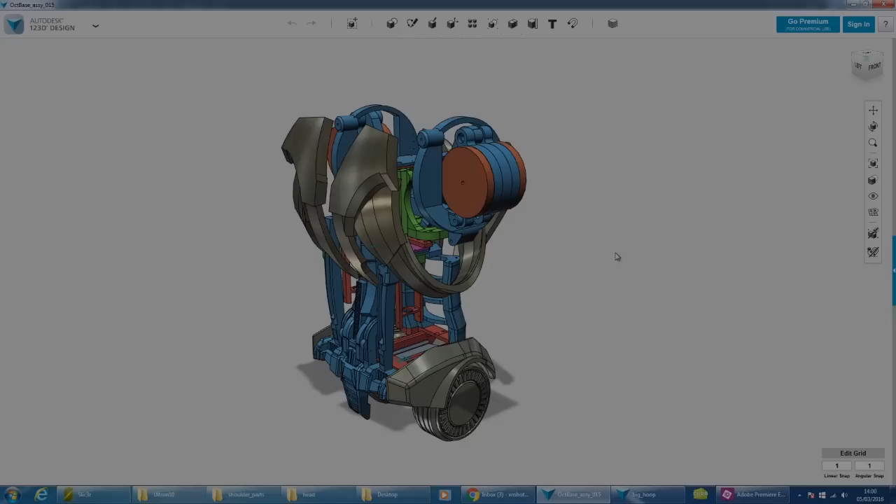The first thing I'm going to do is print some more of the shoulder pieces. I'm going to print these giant sections in here, which are basically most of the lever mechanism. These are going to need to be cut up to be printed. Obviously it's quite a complicated piece. I'm going to print that and this lever, and then after that we can work on the shoulder hubs.

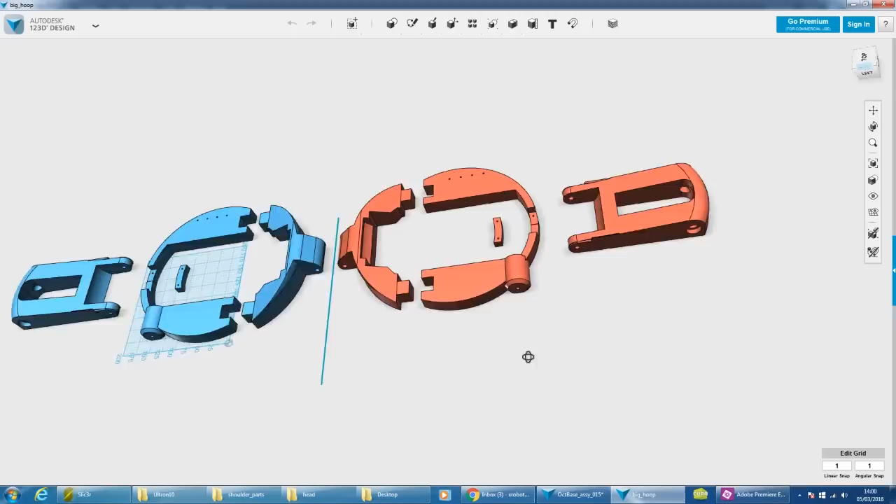So I've cut the parts up here so they fit on the print bed, and these can all be printed in individual pieces. They're all going to be printed in ABS so they can be solvent welded back together when I'm done. I've left these sort of keys so they plug in, and I've divided these into two with a little lump that will screw in there to try and fit that back together. So hopefully they'll all go back together and make one large piece, which is the main shoulder pivot hinge.

Right, here we are. So I've printed all the pieces. They've come out pretty well. They're all large ABS pieces. There's hardly any warping, so pretty happy with those. Tiny bit in that corner, but on the whole that's just a bit of the brim that needs trimming off. So yeah, on the whole, really good prints.

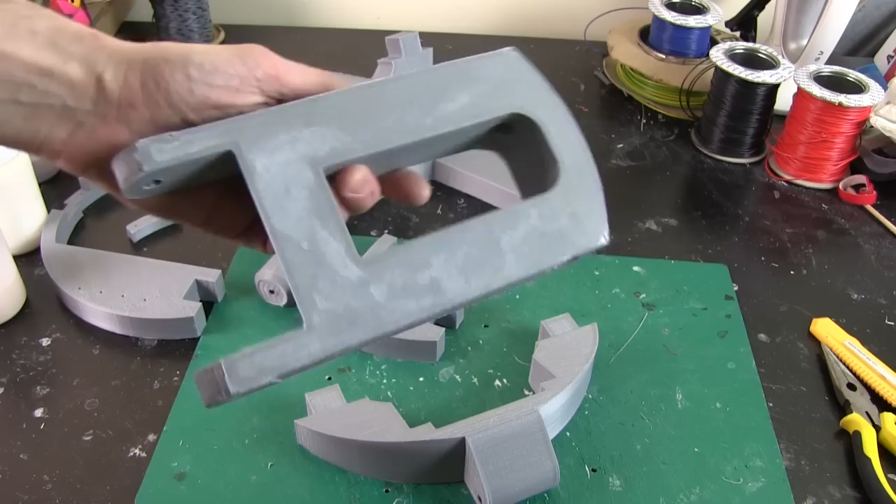Some of them were printed lower density. This piece, for instance, is much lighter and it's only 10% infill. You can see the top surface has suffered slightly there, and that's because there's hardly anything to print the top surface on. There's still 4 top layers, but it's got a bit churned up. But basically these should have some sort of pattern on, so I'll be printing a flatter plate with a veneer to stick on with some patterns on that cover that up, so I'm not too worried about that.

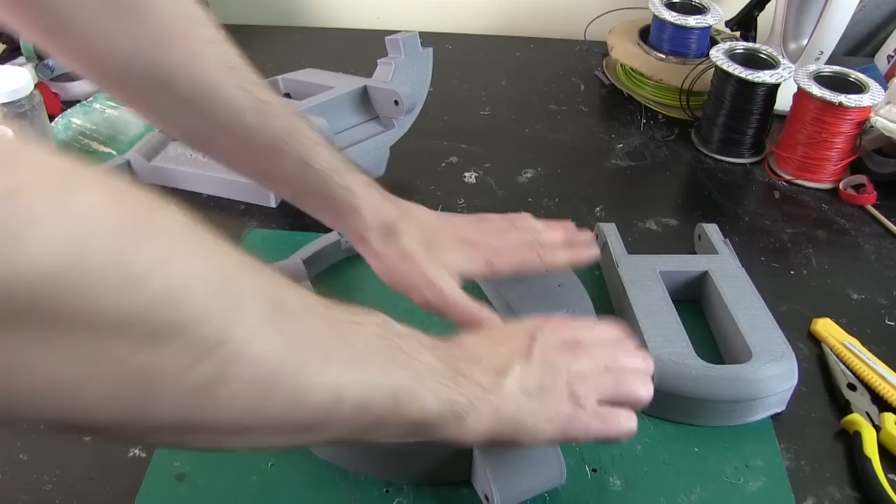But all these parts should lock together. So that goes on there, that goes on there. I've got this little bit, as I said, which goes across the top. So I need to just knock out the corners with a file there, but they should fit together pretty well and they can be solvent welded. And of course this piece is made of 2 bits, so that's the main pivot, and that's where the hub hinges, and that's where the whole thing gets pushed up.

So that is... I can even get it apart, a really tight fit. So again, I just need to attend to those edges with a file and they should fit together really well, and we'll make solvent welds and build these whole pieces up.

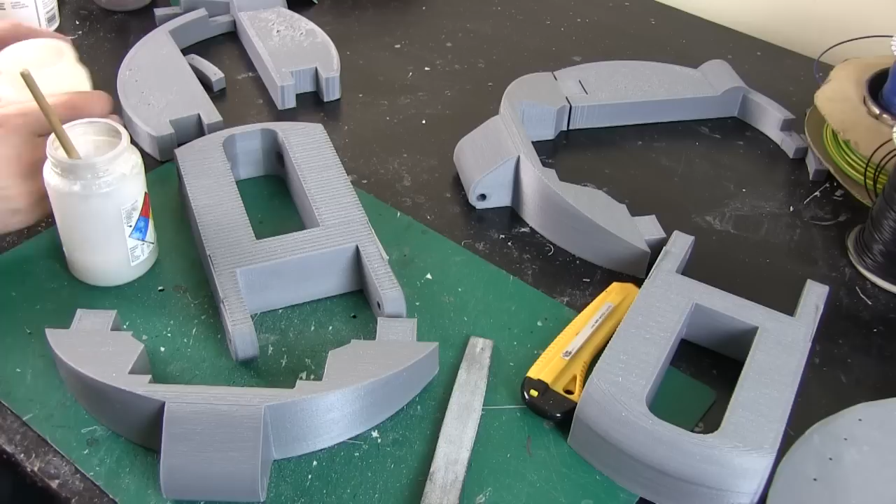As usual, I'm using some acetone to make a solvent weld there, and I've also got some ABS dissolved in acetone, which I probably don't need because they're a really tight fit. I'm just going to put some acetone on all those surfaces that touch. It evaporates pretty quick, so we have to be quick about it. Just use some of that stuff as a filler, put that on some of the surfaces where maybe there's a gap. And making sure everything's the right way round because it will never come undone.

Push that together. I can just go over the edges with a bit of acetone and the capillary action will draw it into the gaps as well. That should make a pretty strong solvent weld, so I'll just put the rest together as well.

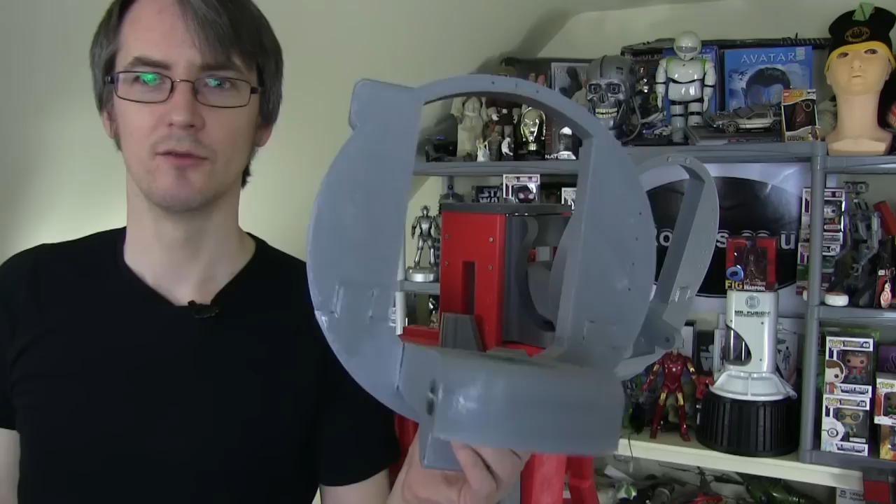Right, here's one of them, all solvent welded together, and it's pretty tough actually. The top doesn't really have any load on it, which is why I did these in a lower density infill, apart from this which has the clavicle, which is just for show really. The main lifting part is in a pretty high density infill.

So I've got some bearings fitted there, which are 8mm internal diameter on each side, so a piece of 8mm studding goes through. It pivots on this piece I made before, and I fitted one here, so let's just rest that in there. So this goes up and down, and they can move forward or swivel like this. So I think that's pretty good really.

So the next thing I need to do is build the actual shoulder hub that holds the shoulder, and because of the leverage the shoulder hub lifts even more to move that whole arm out. Have a look at last time for a bit more explanation on that, but this is more than enough leverage here. So they can come up, not till they quite touch because we need to get the neck in, but that's more than enough motion there.

So I think that's pretty good, and an actuator pushes from underneath, which will be right in the bottom. So let's talk more about this shoulder hub.

So this is the piece I've just made there and attached, and we've already got the internal parts from last time. So now we're going to make this hub that the actual arm mounts onto, and last time I discussed that would have a force sensor in it, so between the red and the blue parts there would be a sensor able to detect how much pressure is being applied, either back driven or if it crashes into something.

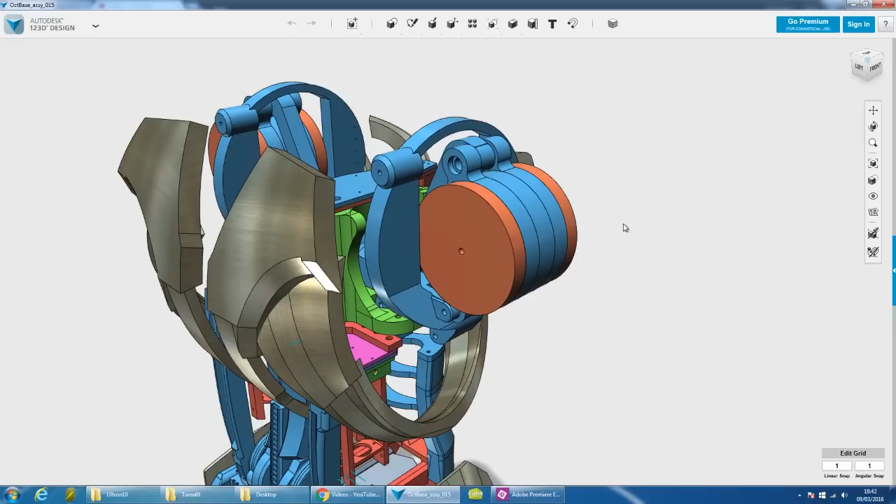And we looked at some electronic components called force sensitive resistors in order to make that work. So there's not going to be much rotation between the red and blue parts, but we do need to get quite a big scale of some sort of variable out of there so that we can detect the motion really easily. Last time we looked at a couple of options.

And I think what I'm going to use is the force sensitive resistors. So these are basically pads which when you press them they change resistance quite dramatically, but there's nothing really squashy in there at all. They're pretty much solid actually. They've also got a self-adhesive backing which makes mounting really easy, so I can use those inside that shoulder hub.

So basically when it rotates in either direction it causes these to get squashed. What I really want to do is set up a pair of them in each joint, so that when the joint is being pushed one way it squashes one, and when it's being rotated the other way it squashes the other one, and when neither are squashed basically that gives us a reading right in the middle.

The problem with this is that when they're not being squashed they read infinity basically, so they're almost completely open circuit, and that makes it quite tricky to make a potential divider. So I'm going to do a bit of electrical testing and see what we can do about that.

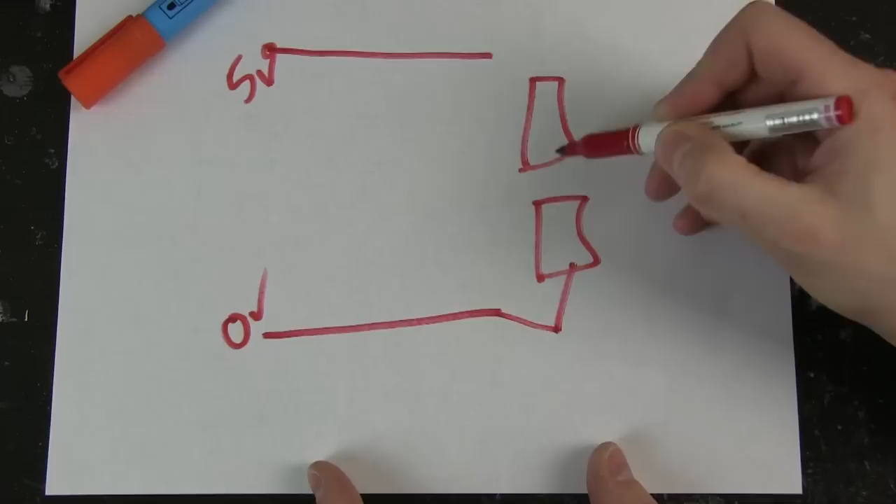So what we're going to do is build a potential divider. We're going to have two power rails here, 5 volts at the top and 0 volts at the bottom, and then we've got our two force sensitive resistors. We're going to put them together like this, and this point in the middle, if these values are the same, let's call them X, then this will be exactly half of 5 volts, so it'll be 2.5. And as these values vary, as one gets more and one gets less, as we push and pull, this value will go up and down based on the ratio.

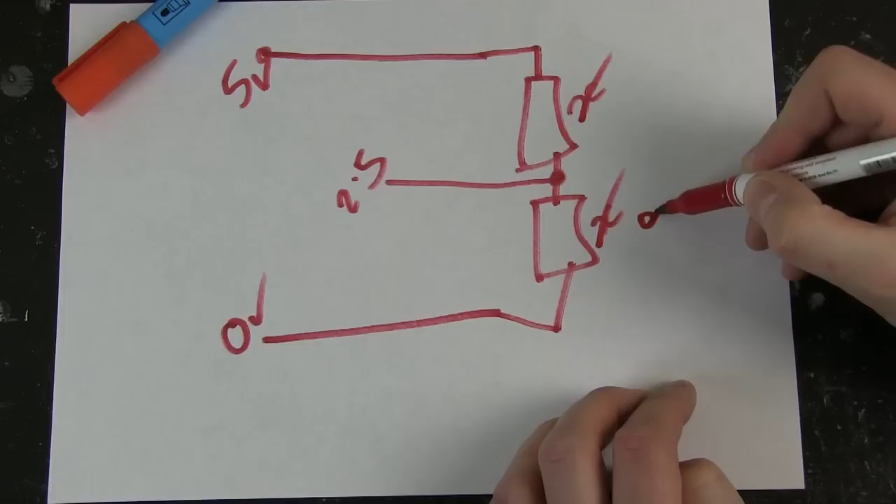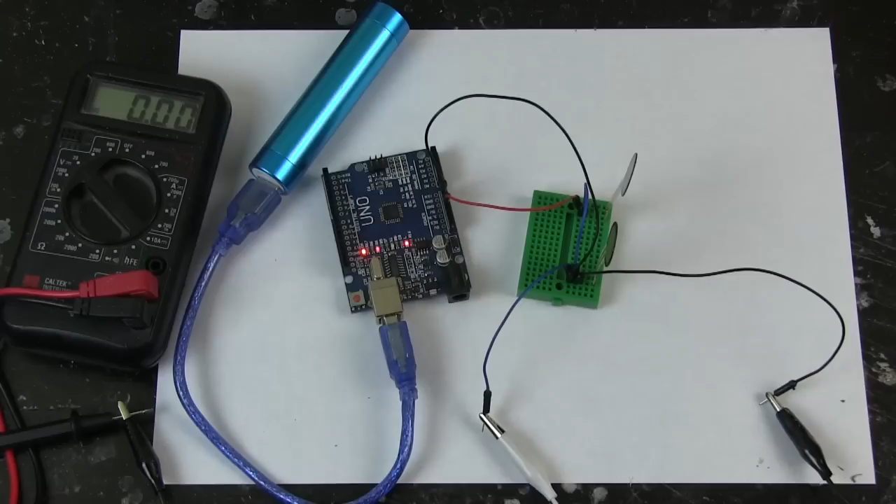The problem we've got is at some point these are completely open circuit, so they are infinity, which is a bit of a problem. It probably means we're not going to get anything here at all because there's no current flowing. But let's put that together and see what happens. So here we are. I'm just using an Arduino Uno powered from a USB boost adapter, and that's just giving me 5 volts, and that's all that's attached.

In reality I would use an analog input to read that value in the middle, and then we could see what forces are being applied. I've set up my force sensitive resistors here, so I've got exactly that arrangement where I've got 5 volts coming in the top, ground going out the bottom at 0 volts, and I've got my multimeter attached reading this point in the middle, also attached to 0 volts, so it works.

At the moment I've got 0 as predicted, but if I tip this over and press the top one, that starts allowing current to flow, and it very quickly goes to 5, probably because there's nothing in the bottom to pull it down to ground. If I now press the bottom one, that starts to pull it down to 0 volts. But if I let go of the top one, it immediately goes to 0, and if I let go of both, it goes to 0, because there's no current flowing through here, so all we've got is 0.

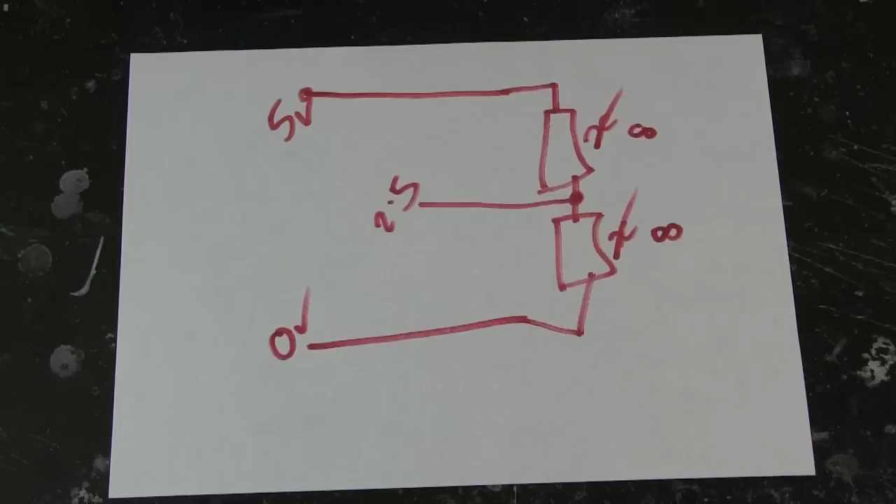So what are we going to do about that? Going back to our diagram, what I'm going to do is add 2 more resistors here of a fairly high value, all linked across as well. These are in parallel with these, and they're going to be around 10 kilo ohms, which is 10,000 ohms. That will make sure this always centers in the middle, and when these get pressed it'll have a massive influence because these go down almost to a few hundred ohms, which overwhelms this, and most of the current goes this way, so that still means my potential divider works.

So let's get two 10k resistors and stick them in parallel with the force sensitive resistors and see what effect that has. Hopefully you can see those two blue resistors I fitted there, and those are in parallel with the force sensitive resistors, 10 kilo ohms each. And when I say ground I mean 0 volts, by the way, it's because I'm old.

Now you can see my meter is reading about 2.5 volts, right in the middle, and if I press one of these it goes up. I can't quite get to 5, but that's fine, and if I press the other one really hard it goes all the way down.

That means I can put these inside the hub and have it apply force to one when you push it one way and the other one when you push it the other way, and there's hardly any motion, so I can detect when that joint is being back driven.

Here's my design for that shoulder hub. The blue and purple parts will be solvent welded together. Those are split up for printing, so they can both be printed flat on the bed. And the red parts are going to rotate independently from them very slightly, and I need to insert the force sensitive resistors between the two parts so I can measure how much.

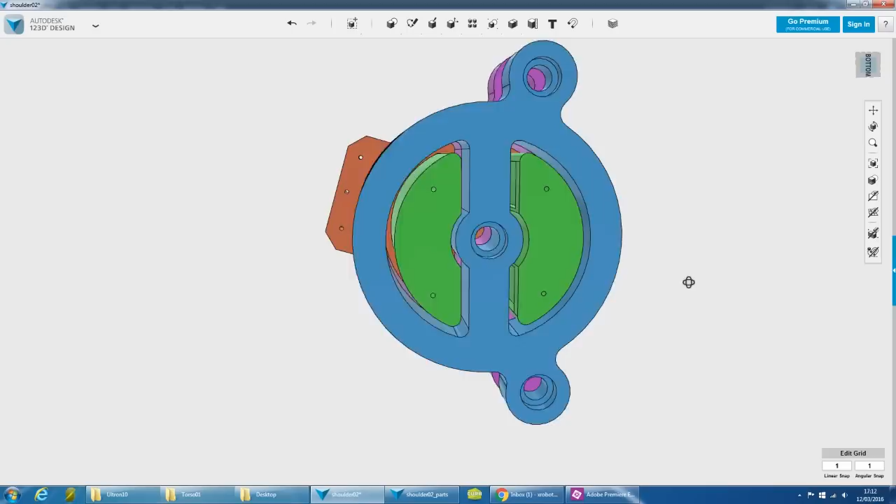I've put some details on the front of this, but what's inside is what's important. What I've got is a central hole where I can fit bearings in the blue parts, back and front, so a piece of studding can run through to allow the red parts to rotate against it. Then the green parts are kind of a core, which stops it rotating, and I've got space for these inserts.

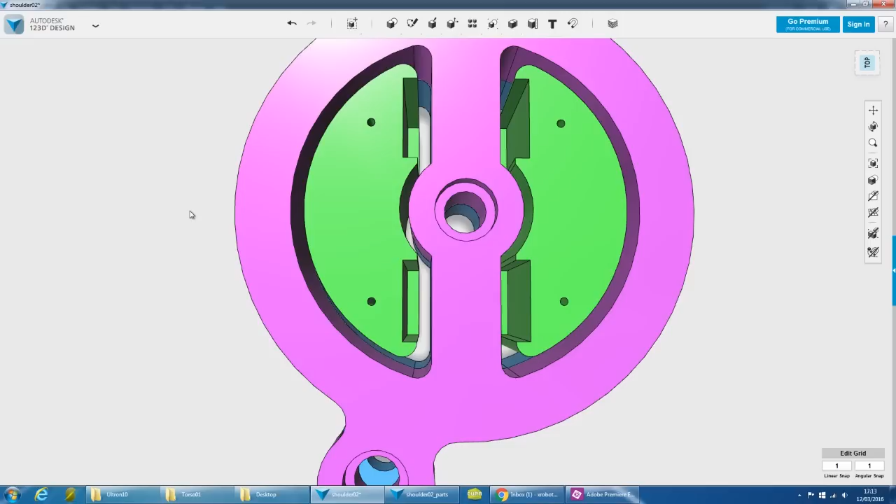In two of those will be something rather solid, either solid NinjaFlex prints or ABS or a combination or some other material, which will act as a stopper to stop them moving against each other. The other two inserts I'll be inserting the force sensitive resistors packed out with some other material, and that allows me to adjust sensitivity and the amount of pressure applied to the force sensitive resistors by adjusting the stoppers essentially. So I can adjust these as I go, as I build the robot up, and we can see how well that works as more mass is added to the arm. Obviously I need to get wires out of there.

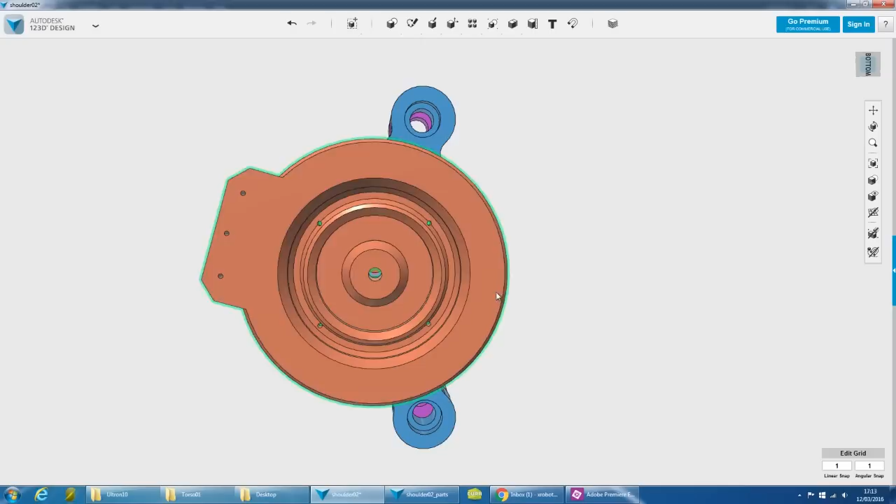So on the back surface I've got these channels which allow the wires to escape, and this is the back of Ultron essentially. This is the front, and you'll notice the attachment on the red part, these parts with 3 holes to attach the arm, is facing out at a slight angle. The arm naturally hangs out at around 15 to 16 degrees, giving greater scope to move outwards as the mechanism goes up and down. We've got the bearing holes in the part sticking out of the middle piece, which will be driven by the actuator and the rest of the arm assembly.

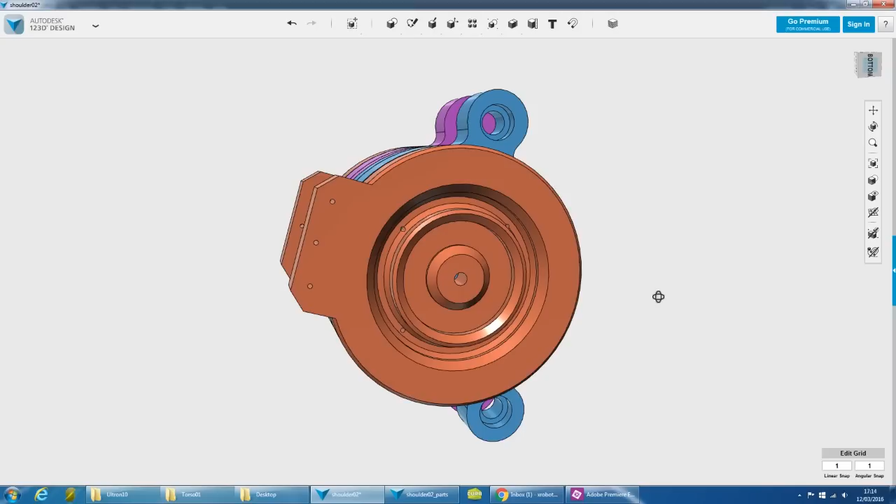So let's get those all printed. I need to print quite a lot of pieces. Obviously I need to make opposites as well to make both arms, and these pieces are quite large, so that's going to take quite a lot of time.

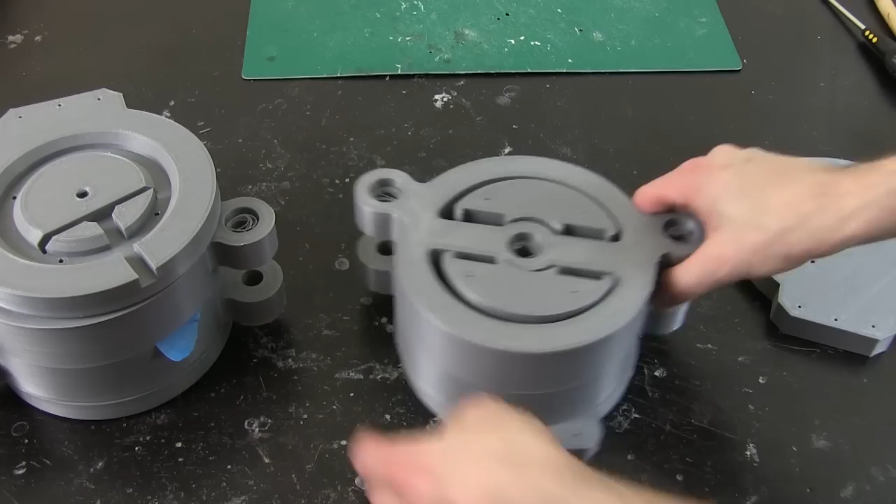So here are those parts. It's a couple of days later. It took quite a long time to print all of them, but we've got the tops and the bottoms, all of those cable channels in there, and these are printed in 2 halves. They're a really good fit - I put keys in so they fit together really well, and all I did was knock those back by 0.2 mil so they fit together really snugly. They're going to be solvent welded together, but there's virtually no movement between them.

And what happens is this goes in here. We can mount bearings in here and a piece of studding all the way through, and you can see that this will rotate a little bit, but not at all that much. Then I can put wedges in here of different materials to dampen that motion. In fact, it'll hardly move at all.

The plan is to put something much firmer in the ones which don't have the force sensitive resistors in, to dampen that motion a lot, so that the force sensitive resistors don't get squashed too much. But I'm going to assemble that, and then we can experiment with some hybrid prints of maybe ABS and NinjaFlex and various materials to shove in there and see what happens.

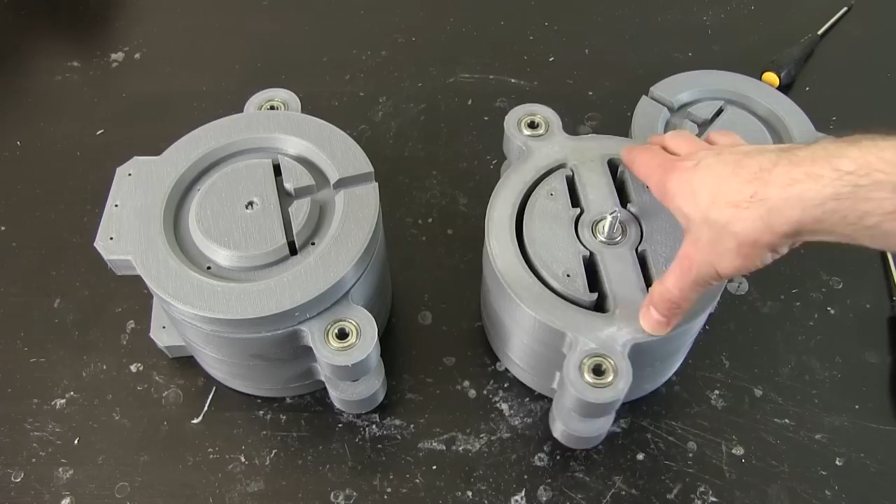So here are my opposite shoulder hubs assembled. Inside here now we've got a piece of studding that runs all the way through, allowing this to rotate against this, which is where the arm is fixed, and this is the anchor point for my lever mechanism for that whole shoulder. We've got a washer on the top, the studding runs all the way through, there's a washer on the bottom, and this piece has bearings, top and bottom, on all of those joints, and it fits quite neatly on there.

And then of course the core is fixed to the back and front, with the 4 screw holes in there. This is then screwed down when the sensors and blocks are in, so that should make the outside very rigid. Obviously the arm is bolted on, which also holds it, and the inside is rigid so they don't twist. And this is the opposite assembly, which is good that I remembered to make opposite parts.

Alright, so now we need to put some inserts in, and I'm going to try some solid NinjaFlex in these two, which will stop that moving. Then probably we'll want something slightly softer in the other two with the force sensitive resistors sandwiched in there. That means I can make this very firm, but basically squash the force sensitive resistors as much as I want as load is applied to this arm, to sense how much there is and to sense when it's being back driven.

I'll probably need to adjust that as I go and build the arm out, because as the arm gets heavier that's going to exert more force, at least on one of them. I could adjust the material so they're different in each case to try and balance that up, or I could do it electronically, but we'll have to see how that goes. So I'm going to print some blocks to put in here. Obviously the force sensitive resistor wires come out of there, which is why they're on this side.

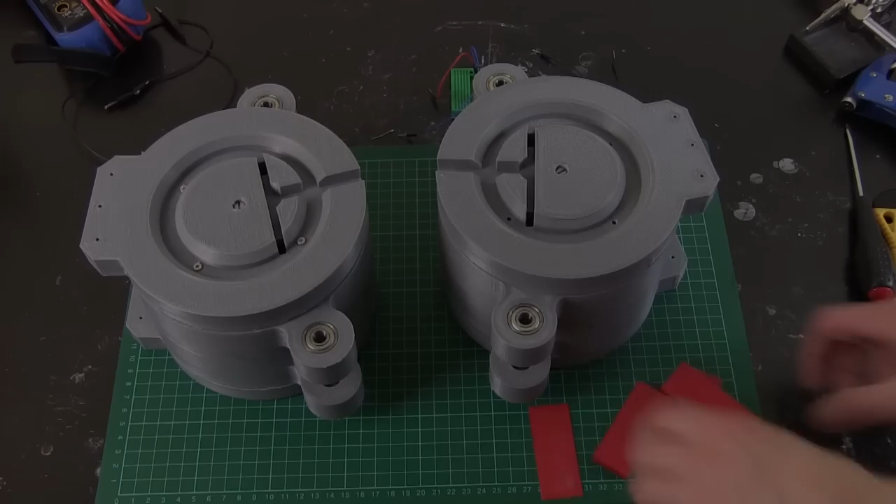Right, I've printed some NinjaFlex blocks and some other shims which I've printed in ABS. If we take the top of this one, we should find that we can insert these like this, and these like this. I thought these were a fairly snug fit and it's pretty hard to get them in, but in fact it still allows some motion. And the other side has got them inserted, and you can see there is quite a bit of motion there, or at least a little bit. But I'm not sure if this is right or wrong really, because I do want some movement.

The plan is probably going to be, once the force sensitive resistors are inserted, to put something much softer in that side. So it may even be some layers of craft foam or something fairly dense, or it may be a bit of NinjaFlex in a lower density infill, and then some foam to press these so they don't get pressed really hard straight away.

The idea was to have firmer stuff in here so that I can control the amount these are pressed, and obviously it's got the load of the whole arm on. So for now I'm not going to try and tune this up because I really don't know how heavy the arm is going to be, but that's the basic principle - we've got these pressure pads pushing these and we can get force feedback. This is only for feedback on the joint, to measure the load, not actually for sensing the angle that it's at. That will come into the actuator that I'm going to build next time.

So I'm going to get this top screwed on and then we'll mount these onto the torso. Here's the current state of the torso.

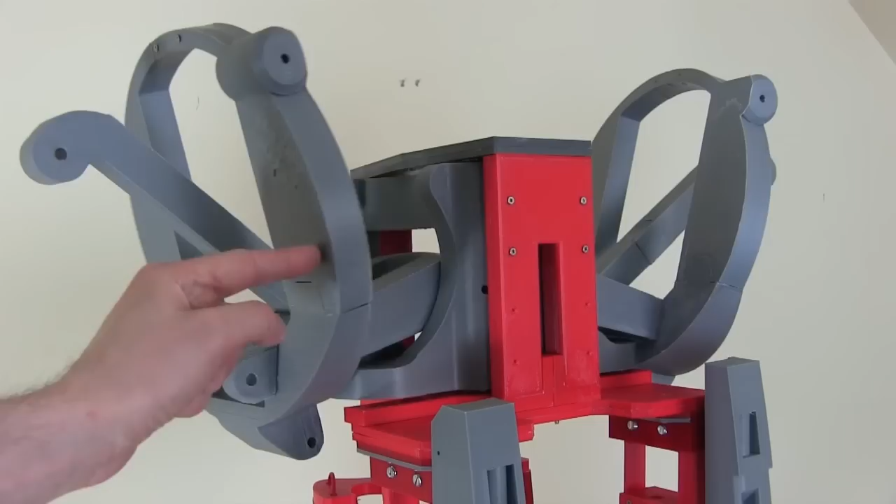So these pieces were on before, but I've now attached these levers, so my new parts will go between these two points. The levers don't move very much - right at the bottom there they go into those points, and they don't have bearings, they just have some 8mm smooth bar which goes in here, and that's what allows these to pivot. So I'm now going to mount those shoulder hubs on each side, and we'll see how much motion we get when the shoulder lifts.

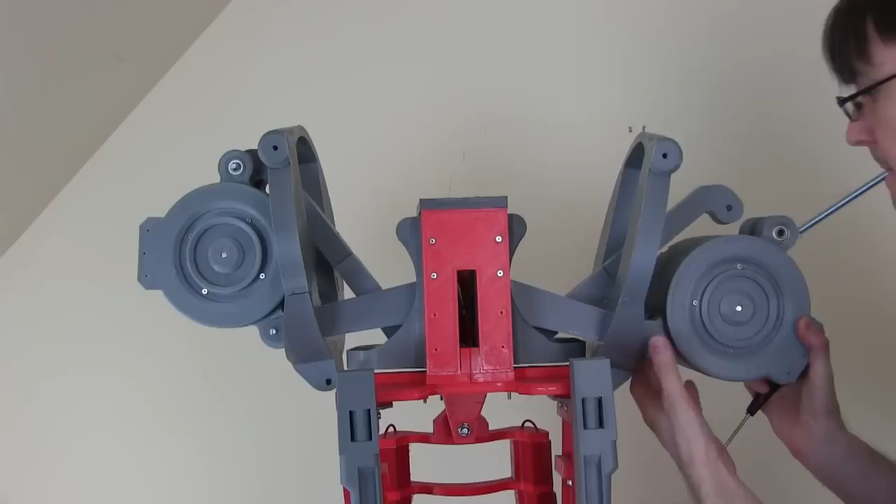So those are fitted, and the sort of range of motion I get is pretty much this - they can move all around, and these angles here are where the arms are attached, so if you can imagine that coming right out to here, then that's pretty much okay with me. Obviously the torso can move up and down, so it can always move like this as well if it needs to, but I'm pretty happy with that range of motion.

As you can see, this leverage mechanism is working with this long rod to pull this back, even though this part isn't moving very far, which is kind of what I'd intended. I'd like to have had longer levers in this part that went down lower, but of course they can't do that because they'll be crashing into the actuators below.

Now at the moment this looks quite wobbly, and that's because basically there's no actuators with any end stop on these, so they're kind of pivoting on the range of motion that they've got. But if I put in some temporary blocks, you can see that they're much more solid. So once those actuators are in place and they actually have a hard end stop on, most of that wobble has gone away. So that's much better. There is some wobble side to side and around with the flexible spine and the other actuators I built, but of course there's going to be arms hanging down which will help make that more stable.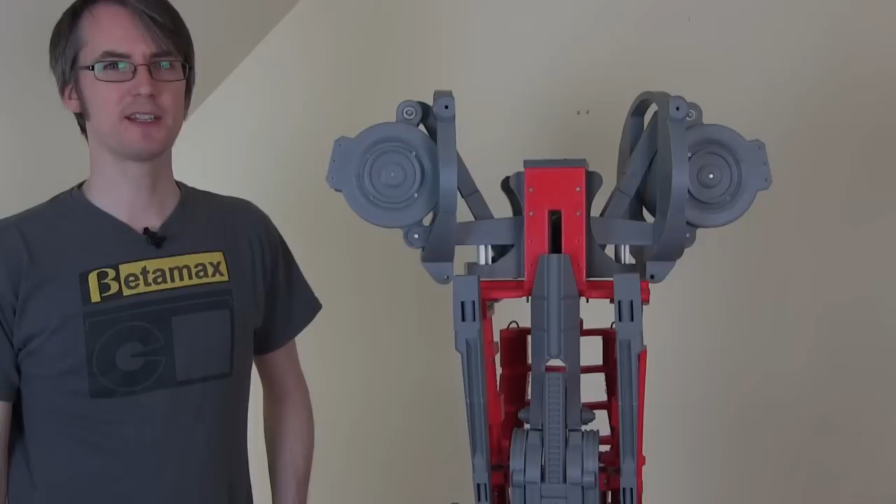Due to the excessive amount of 3D printing that's gone on in this episode, that's all I've got time for. Next time I'll be building some actuators to actually hopefully lift these up, which are going to fit just underneath, and also move them back and front hopefully.